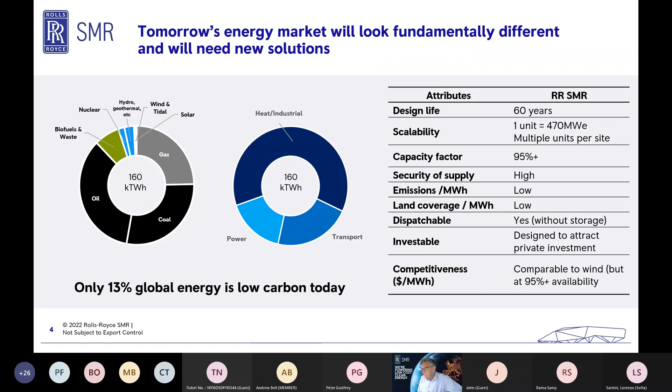And we certainly believe our SMR is a product that can address these needs and provide a means to help establish and maintain a high quality, clean and affordable energy solution, and I'll walk you through that. So what are we doing in SMR? Why are we different? Why are we taking a different approach?

When we kicked off in 2015, we looked at the market, and it was clear very quickly that really all the utilities want safe, low cost, clean energy that can be produced and sold at a profit. That's largely dictated by the levelized cost of electricity equation. So consequently, we recognised that we needed to control all elements within this equation, basically trying to minimise everything on the top and maximise everything on the bottom of the quotient.

And then around that, all the peripheral dependencies and drivers that sit outwith this equation, things like the regulatory aspects, the market, the public perception, the infrastructure and so on. We simply categorise that as external risks and opportunities that we need to understand and we need to manage. And that's the way we started to tackle it.

We also did a deep dive on other civil SMR programs and found that primarily their focus looks at the reactor, the fuel cycle and control systems, with very little effort on other things. But conversely, when we took a look at the critical risks that civil power station programs normally encounter, they related to the other things. In particular, risks associated with civil engineering, with the manufacturing supply chain, and really not much done around the digital technologies and how that digital ecosystem can massively help drive out cost and improve productivity.

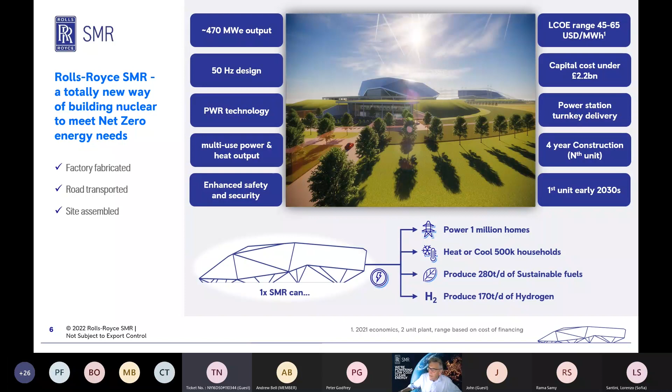So what's it look like? Bit of an overview of the power station. The primary reactor plant sits within that containment vessel located within the reactor island. To give it a bit of scale, the containment vessel is about 40 meters high, it's about 30 meters diameter. And that's where the nuclear reactor sits, and that's where the hot water is generated, and we use that to make steam. Steam then passes to high and low pressure turbines in this turbine island, and that's where we generate electricity. And then any residual steam we condense and send it back to the steam generator feed system. So we conserve water in that way.

And then the cooling water island, that's used to manage the heat balance across the plant. As you would expect, there's a whole load of other systems around the patch that look at functional and safety aspects, and to ensure that the operating range of the plant keeps under control so that we're efficient and we're safe.

I think another important aspect of characterization is that we use modular cooling towers to give maximum flexibility for site locations. So we don't need to be next to the sea. We don't need to be near a big river. Clearly we do need water, but by using cooling towers, we don't discharge surplus hot water into the sea or rivers, so we protect the ecosystem in that way. Also, that hot water we can repurpose, and we could use it for other applications such as domestic heating or agricultural heating needs. So we're trying to consider that as part of the design.

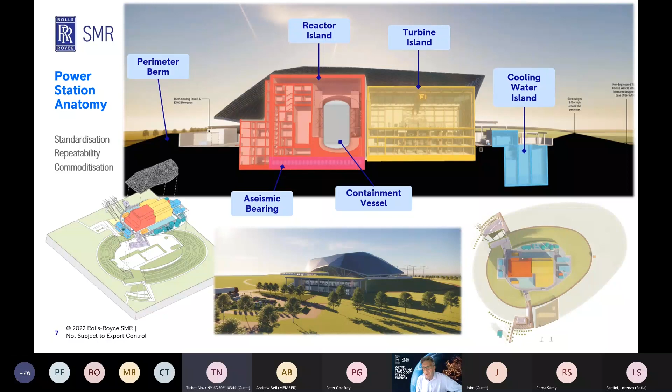But nevertheless, we've looked with the architects at how to create a power station that's deliberately iconic and sympathetic with the landscape. And all that combines to reinforce that Rolls-Royce SMR is a new approach to delivering nuclear power. It's affordable, but it looks good as well. It's sympathetic with the environment.

Bit on the manufacturing piece, really important. Our commoditized design approach for manufacturing is economic because, as I've already mentioned, we aim to build a fleet of stations in the UK and globally. And that's really an important piece of the jigsaw that makes our factory-built power station repeatable and cost-effective. We manufacture in a controlled factory environment off-site using advanced flow lines, quality and testing regimes. We use industrial digital technologies, and we then install and commission these high value commodities in a controlled environment at site, in a weatherproof site factory.

That whole process is coordinated and verified using a digital twin that brings together a controlled digital record of the configuration of the power station, and that's used not just for the build and manufacturing operations, but that digital twin then carries on with the power station through life. It's a really important way of ensuring the thing's working as we expect, and we've got the right things like maintenance regimes and that kind of thing. Again, building in efficiencies as we go through life.

So what we're trying to do here is bring very much a Rolls-Royce approach to making quality products. We're bringing that approach to a 21st century civil nuclear power station, and that's a paradigm shift from the traditional civil nuclear approach. So all this, together with how we manage the site work, is our unique selling point, and it's what makes the end-to-end economics all add up.

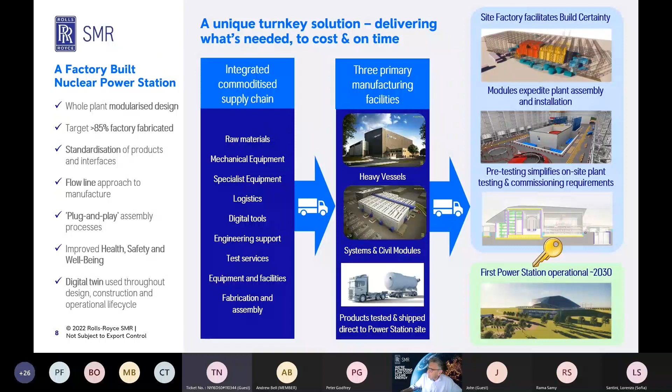I guess just to labour the point, as I've said, we're not simply a nuclear reactor designer that's trying to sell a reactor concept. What we're doing at Rolls-Royce SMR is delivering a fully integrated turnkey nuclear power station, and we do that under a single contract. We provide the component designs, the system engineering, the plant integration. We manage the logistics and the supply chain.

As I already said, we build in factories, we transport to site, we assemble it at site, we start it up and we commission it, and then we hand it over to the customer. So it's a full turnkey solution. And then the customer operates it over its lifetime for what's needed, whether it's on-grid or off-grid power.

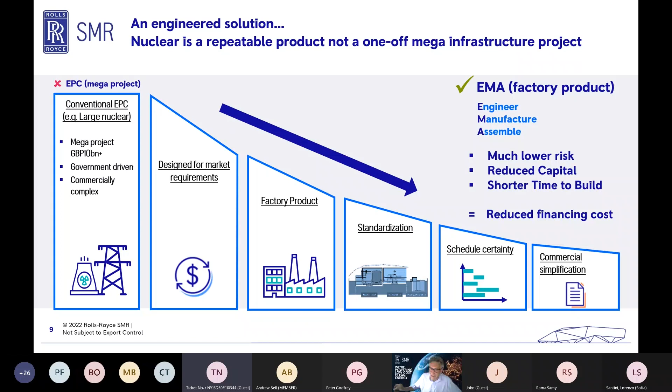And then just a few closing slides. I think our SMR is too elegant a solution to simply use for base load on-grid power. That's often trotted out as the purpose of nuclear. I think we can be cleverer than that. And I think it's important to take a much wider look at potential opportunities. And there's a few sensible and practical industrial applications and ideas on this slide here. We very much see our SMR as a product that can sit within this global industrial arena. And I think it's important we start to look at it that kind of way. We look at nuclear that way.

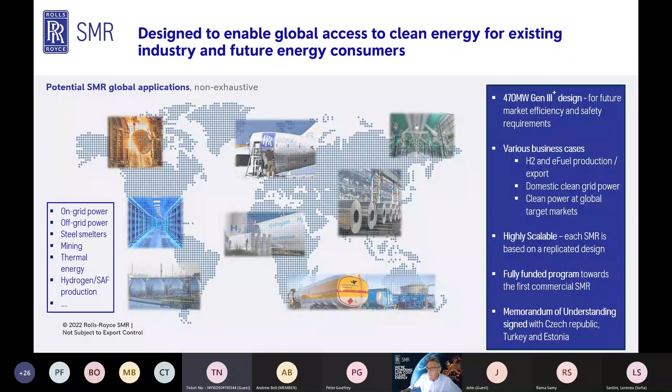Just a quick one on timeline. This is the current timeline that we're working within. Final concept design completes middle of next year. We expect UK regulatory approval to complete Q3 2026. We're already into that approval process. We started discussions with the regulator as part of the phase of the programme a few weeks ago. So that's already in hand, already going well. And we're driving very hard to be on grid by the end of the decade. And there's some people trying to bring us even further left than that, but we'll see what we can do.

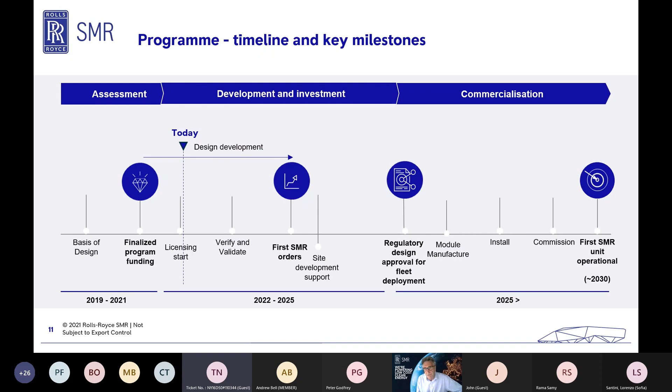And then final slide. I think great strides are underway to increase wind and solar, and clearly that must continue. We're a big advocate for that, but there are shortfalls, and I'm sure others will have discussed that, and there's probably a few questions around that, so I'll not dwell on that. But I think either way, affordable and investable, always-on low carbon power is needed, and this can be backed by Rolls-Royce SMR.

So I think I'll stop there, Peter, if that's okay. I'll just leave you with this vision of what the future could look like, and yeah, welcome the discussion later on. Thanks very much.

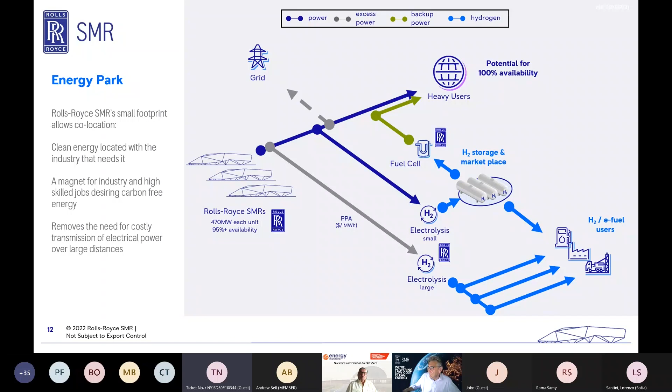I mean, clearly a lot of questions around pace and scale of development and how the market is going to accept SMRs going forwards, both in Europe and the UK, where obviously things are beginning to start kicking off, but also from an international perspective. So we'll come back and talk about that later on, I'm sure, Paul. So thank you very much.

Okay, thank you. So, what I'd like to do now is introduce our second speaker, Clare Turgoose, who will further expand on Paul's comments, I'm sure. Clare is actually an analyst at Sizewell C Project in the UK, where her role specifically relates to making the case for new nuclear in the UK and engaging with the government and investors to develop the financing and business frameworks for the Sizewell C Project.

So we couldn't really ask for someone better to follow Paul in terms of taking some of the story of Rolls-Royce and what they're trying to develop and put it into the perspective of where markets are going to go, and certainly where the UK is likely to go in terms of the nuclear sector going forwards. Clare is also a member of the Nuclear Institute Young Generation Network Committee and is a very active member of the Nuclear Institute. So welcome, Clare. We're looking forward to hearing what you have to say. So over to you. Thank you.

Thanks, Peter. So hi, everyone. As Peter said, I currently work on the Sizewell C Project. I've been doing this role now for about 2.5 years, and prior to that, I worked within the energy industry. So I'm a strong advocate for nuclear power and the role that it can play in helping us tackle climate change and supporting the UK and countries around the world in getting to net zero and phasing out fossil fuels.

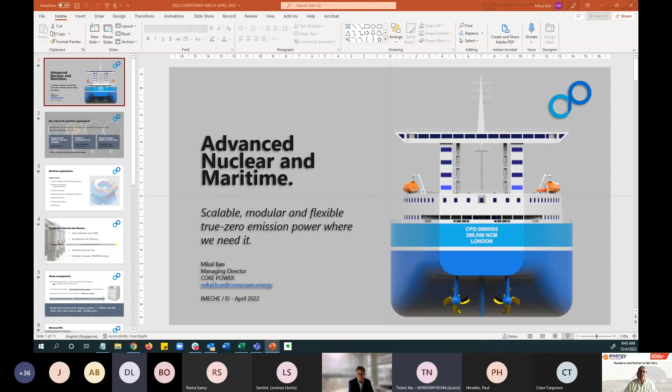Mikal, can I just disturb you for a minute? You're still on your introductory slide. Are you meant to be moving on? I am. Why isn't it moving on?

Okay, so if I do... You're maybe not on your slideshow. There we go. Thank you. Okay, so yeah, okay, apologies.

So these three criteria is long fuel cycles. The second one, which I think is probably the most important one, is that we need to be able to operate with machines that have no pressure and or only ambient pressure. And this enables us to move to what's essentially very small emergency planning zones. I'll get back to that later on. But it means that we can put nuclear technologies close to people, in ports, close to coastlines, etc., without having large emergency planning zones around them.

And that idea that we can build them in shipyards through modular design and construction means that we can make them affordable and a mass assembled product. So rather than a project, it becomes a product. And I think those are some of the key issues that we have here.

Just check, Peter, did that move on to the next slide? Yes, that's fine. Very good.

Okay. So in terms of maritime applications, there are several interesting target markets that we can look at then. So we're really looking at everything from nuclear electric propulsion of ships, which isn't necessarily going to work for all types of ships, but it's going to work for some of the largest ships out there. Don't forget, in the shipping industry, we've got about 20% of the ships out of a fleet of 100,000 ships, so about 20,000 out of 100,000 ships, consuming about 80% of all marine fuels. So basically providing 80% of all the pollution. So a small number of ships solves the pollution issue from shipping. So nuclear electric propulsion is a very interesting market, which we're getting a lot of support from.

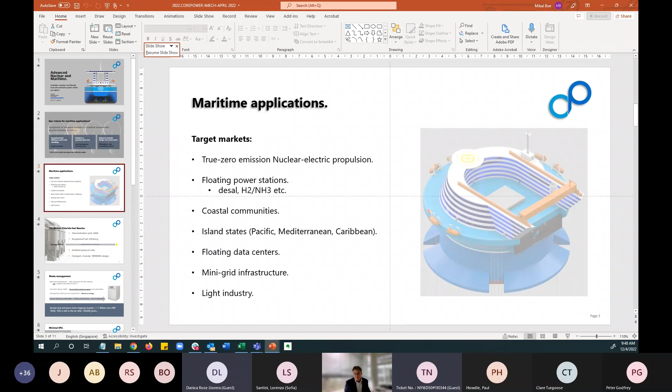We believe this is something that can provide anything from about 5 to 10 megawatts for small countries like Tonga, up to several gigawatts for large nations that require enormous amounts of power. So coastal communities is really where this fits in. Island states in the Pacific, Mediterranean, Caribbean, again, we can provide that kind of small, compact, floating power solution for grid, for water desalination, and potentially also for some localized hydrogen production that's completely resilient to the environment. Floating data centers, mini-grid infrastructure, and of course light industry are also potential solutions for this.

We're working on several designs with some of the big vendors out there. One of the most exciting ones that we're involved in at the moment is a molten salt reactor. In particular, this is a molten chloride fast reactor. It's the first ever fast spectrum molten salt reactor that's been built, and we've got a program now running with an organization in the United States called TerraPower, Southern Company, one of the big utilities in the United States, Orano, the French national nuclear fuels company, and of course with backing from the US government, from the US Department of Energy, where this is now being built at Idaho National Laboratory. The first of the small test reactors will be finished in 2025. That's really an experimental reactor to prove the neutronics of this. And then we're expecting demonstration programs to start post 2026.

The nice thing about the molten chloride fast reactor is that it does things differently. It's a liquid fueled reactor, it has ambient pressure only, and it has an exceptional fuel efficiency. This idea that we can run a very long fuel cycle with a liquid fuel circulating naturally around the reactor means that we're effectively running a fuel efficiency equivalent to consuming 1 gram of fuel per megawatt day, which leaves the tiniest little waste footprint that you can imagine. So this is really new types of nuclear energy technology.

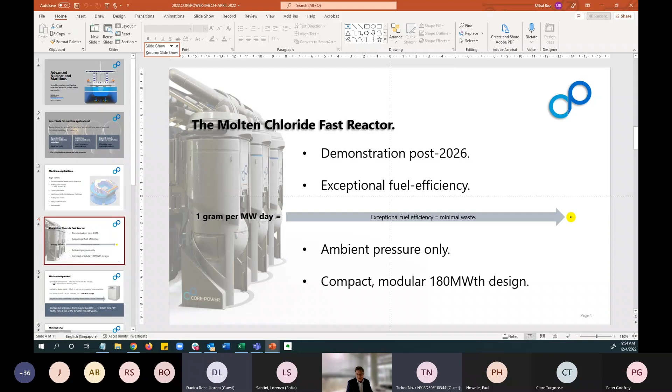I think you need to advance your slides again. Yeah. Sorry, apologies. I'm using the wrong screen.

Emergency planning zone of meters rather than kilometers, which means that we have the potential to have that EPZ, if you like, on the actual vessel itself and not stretching outside, which means that you can move up and down rivers, you can have them near to the coast, you can have these sitting near coastal communities and small island states, etc. We think that matters a lot. And I think it matters a lot for Singapore as well.

One of the key things about nuclear in Singapore is the idea that you have a small nation, very high population, of about 5.5 million people, and a large emergency planning zone of anything between 50 and 80 kilometers in Singapore covers a very large portion of the country. So here is a potential solution for countries like Singapore, where you need to be able to contain this in a very, very small area.

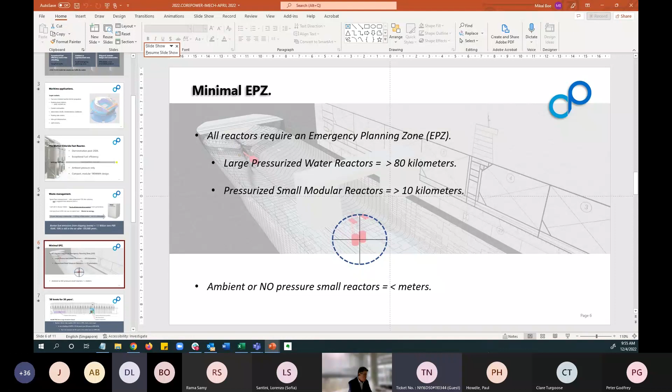That large container ship that I talked about earlier is the one that we did that design of in Japan, and is now in the process of moving from concept design to basic design. It does special things in the sense that we can get a very high speed on this vessel, which shortens trips around the world. She's true zero emissions, so she is effectively not emitting anything during her lifetime. Of course, there's a carbon footprint in the manufacturing of the vessel and the reactors and the fuel, et cetera, but it is very, very small.

The special thing about being able to do this is that you've effectively got a vessel that can go faster, carry more cargo, and do it for longer than ships today, and it's immune to carbon pricing. Every single ton of bunker fuel used on a vessel is about 3.2 tons of carbon dioxide. And we're now looking at a new carbon taxation regime being introduced into the shipping industry over the next few years of anything between $100 and $200 per ton of carbon.

If we take a midpoint there at about $150, each one of these vessels would have a carbon taxation cost of $750 million over a lifetime of that ship. You can add that to the operational expense of the vessel, which gets passed on to the consumers, and that becomes expensive container shipping. So we believe that the way that these new types of reactors can make these ships more competitive is basically by having them completely immune to carbon taxation, being able to carry more cargo faster and for longer. It puts competitiveness back into this industry.

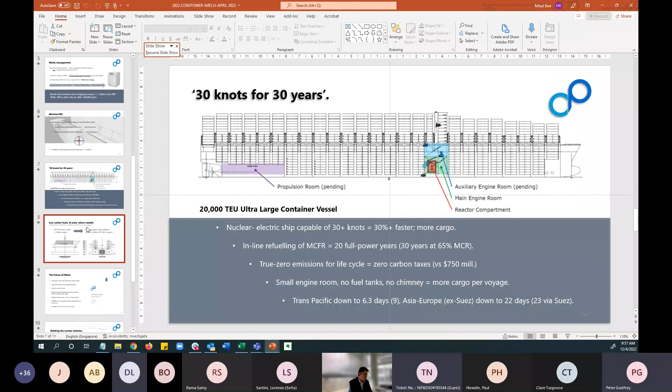In terms of floating power, we've designed this large floating power station that I showed you earlier on. It's effectively a 4-reactor system with molten salt reactors on board, providing anything up to 1.2 gigawatt electric. So you've now got basically floating power that you can plug hydrogen production plants, ammonia production plants, or plug it straight into the grid. The nice thing about this type of reactor technology as well is that you get high temperature heat as well as electricity. So you get that additional efficiency combination of high temperature heat and electricity to get more efficient hydrogen production, ammonia production, methanol production, synthetic fuels production as you go along.

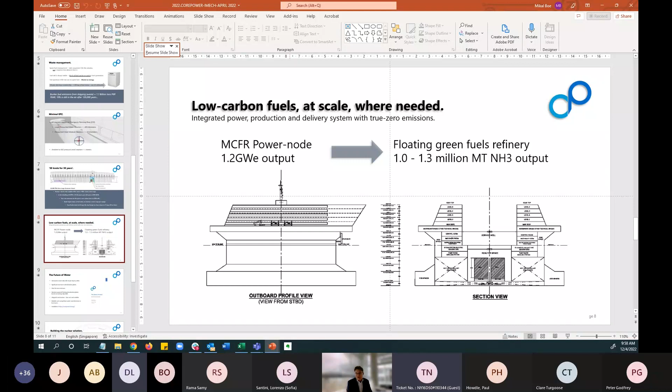We've recently also released a report which is called The Future of Water, and we believe that advanced nuclear floating water desalination plants, again, constructed in shipyards, moved to where they're needed to be, can be the solution for a lot of small countries and areas where water stress is becoming a major issue. Demand for desalination is forecast to get to close to 300 million cubic meters per day by 2050 and continue on from there. And really, the only way that we're going to be able to keep up with this is to desalinate more water. And to do that without a carbon footprint, we are going to have to use nuclear technologies to do so.

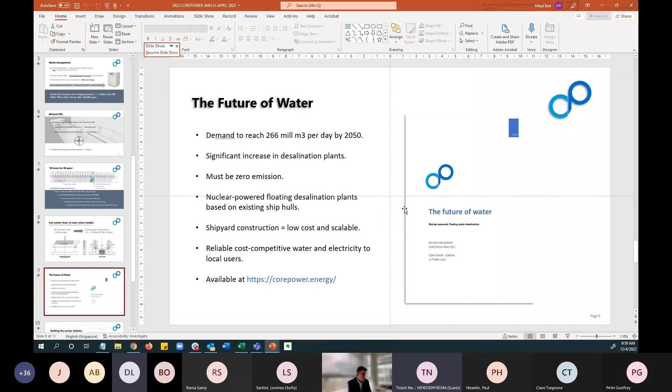Constructing those in shipyards, putting them on flexible, movable systems that sit out at sea, surrounded by all of the water that it needs to desalinate, as well as the ultimate, if you like, heat sink and coolant that we need around these, is the ultimate way to do this. Nations like Tonga and Fiji and the Caribbean, etc., can look to this technology as being one that is immune to the kind of disastrous tsunamis and cyclones and hurricanes that eventually come through and devastate those countries. Electric power and desalinated water, a fantastic way forward for this.

The way that Core Power gets involved in this is that we're partnering with large organizations to build reactor technology. We are specialists on the maritime side, not on the nuclear side, so that's why we partner with companies like TerraPower, Southern Company, and others. And our mission is really to build and fulfill these markets. So we co-fund the reactor development. We're investors in the Molten Chloride Fast Reactor and a couple of others.

We contribute that marine engineering to those organizations so that they can make these reactors marine ready through, if you like, early designs, through demonstration and into the final production stage. We develop the entire power package around this. So that nuclear electric power package that's appropriate for marine environment is important to this. And of course, we are deeply involved in the work in modernizing regulations for this.

No regulations currently exist that are valid really for floating nuclear power plants or transportable nuclear power plants. And we're deeply involved with the International Atomic Energy Agency and various regulators around the world to make sure that those rules and regulations are set out correctly. And of course, then we engage with industry.

We're backed by shipping industry investors. We have 42 shareholders in Core Power, all from the shipping industry, and there's more and more of those coming through. So maritime is getting behind this. And eventually, of course, our aim is to fulfill these markets and make sure that these solutions get put out and create solutions not just for countries, but for industry and heavy transport.

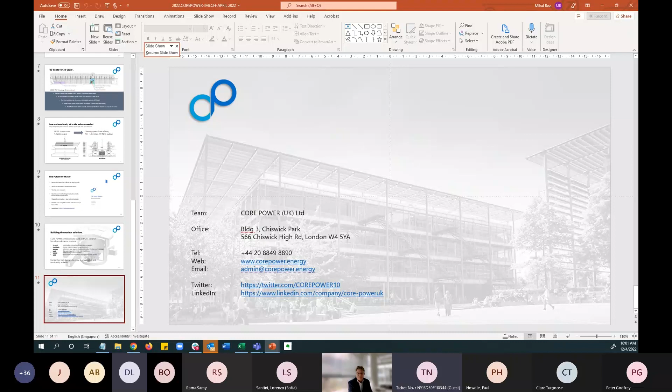And maybe we should start, as the panelists put on their cameras, with the point that you just started to talk about, Mikal, and the headline, I think: there are no regulations. From that point of view, to actually go about developing this business in terms of pace and scale, whether we're talking about SMRs and on-grid energy versus some of these more exotic types of development, there's a long way to go.

So I guess I've got a question representing both the IMechE and the Energy Institute: yes, it does look like nuclear is very much back on. Yes, there is an appetite to get things moving, but how quickly do we need to get governments and standards and everything up and running before we can truly develop markets and regulations and a true business around this? So a fundamental question, really to Clare and Paul initially, having started this in the UK, is how do we go about accelerating the regulatory development that is required around all of this? Paul, maybe you'd like to kick off.

Right, okay, yeah, it's a great question. So hopefully I've tried to outline from a Rolls-Royce SMR perspective, we've deliberately tried to mitigate the risk of having problems going through the regulatory process by the kind of plant we've designed. So that's the way we're attempting to minimize the timescale. As I touched on, we've already started that formal regulatory process. We'll come out of that in 2026. We're not expecting any curveballs, and that means we'll be good to go.